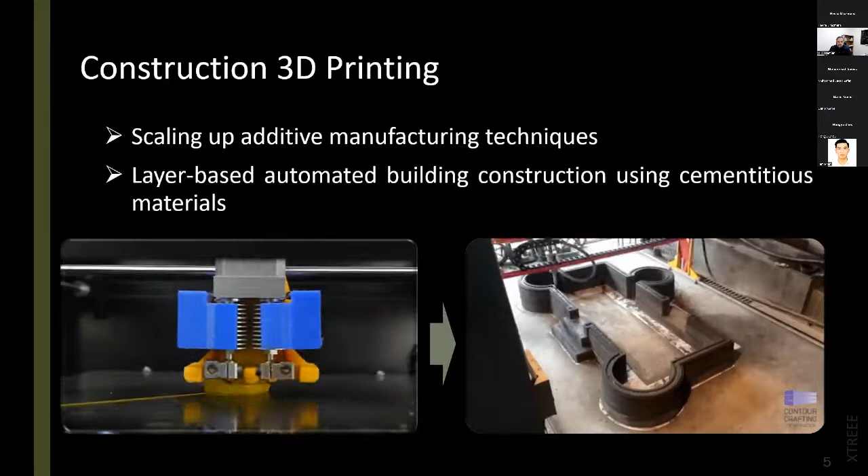I guess all of you are familiar with additive manufacturing, or those desktop 3D printers that are very accessible these days. So the idea of construction 3D printing is basically to scale up those technologies and use them for construction applications to build real scale structures by deposition of layers on top of each other.

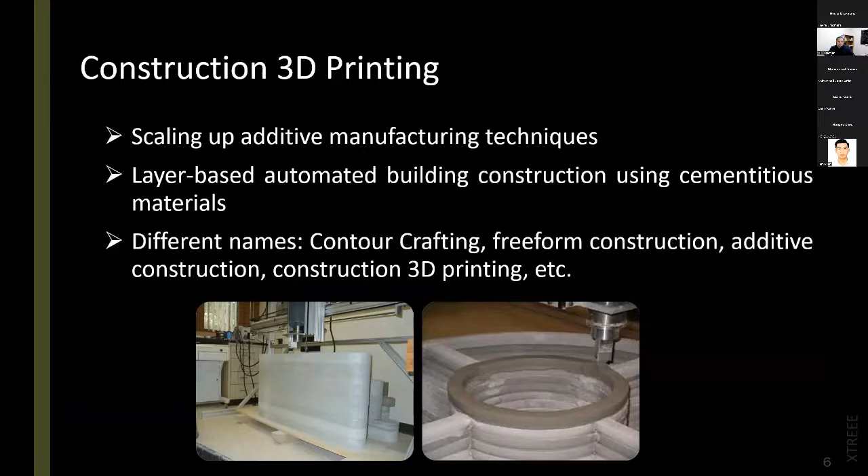You might hear different names: contour crafting, additive construction, or construction 3D printing, for the more or less same technology. Here are some pictures of samples which were printed more than 15-20 years ago using contour crafting, which was actually the first technology invented many years ago at USC.

There are many advantages that we are hoping to achieve with construction 3D printing. One of the most important ones is due to the fact that we don't need any kind of formwork with construction 3D printing. In typical concrete construction, usually 35 to 60% of total concrete construction cost is basically associated with formwork. So by eliminating formwork from the construction process, we can achieve significant reductions in construction time and cost.

The high degree of customization and freedom in architectural design is another advantage of construction 3D printing. Unlike traditional prefabrication, we don't need to replicate a specific design again and again to streamline production or reduce cost. With 3D printing, every structure can be different without any additional cost added to the project, because the robot is doing the job, and it doesn't matter if the design is the same or different compared to the last project.

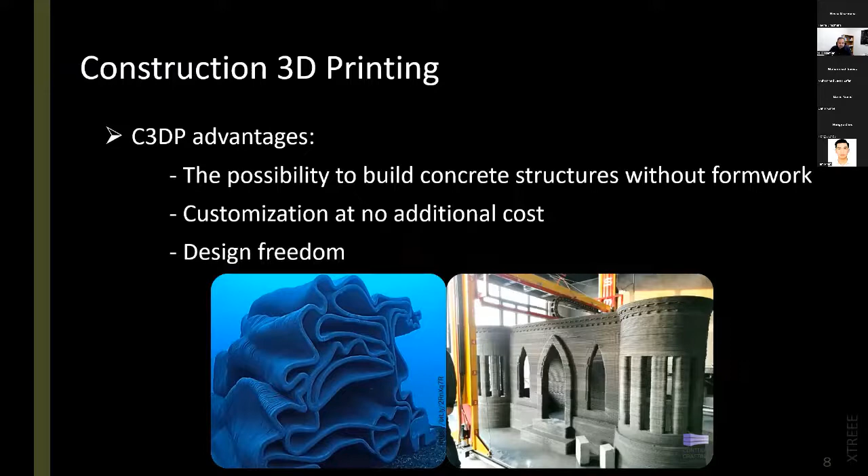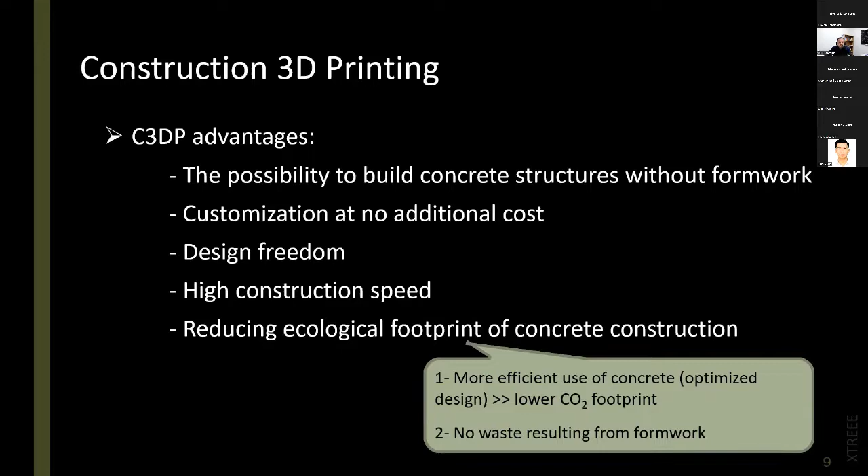Because of the automated nature of this technology, we are talking about 3D printing of, for example, houses in a matter of a few days rather than several months. The environmental aspects could also be much improved in construction and infrastructure, because of several reasons including the shorter construction period, more efficient use of materials, and getting rid of formwork, which generates a lot of waste.

As a platform technology, construction 3D printing has a lot of applications in different areas. A lot of people and companies are working on 3D printed bridges, especially in Europe and more recently in the US. 3D printed houses, especially for low-income housing, is another interesting application domain. And 3D printed towers for disaster relief or emergency construction of temporary or permanent shelters is another area that different agencies are working on.

Here are two images related to a project that General Electric is doing. They are investing a lot of money on using construction 3D printing for wind turbine tower construction, which would significantly reduce the construction cost compared to traditional ways of building wind turbine towers, using steel segments in factories and transporting them to the construction site, which is super expensive.

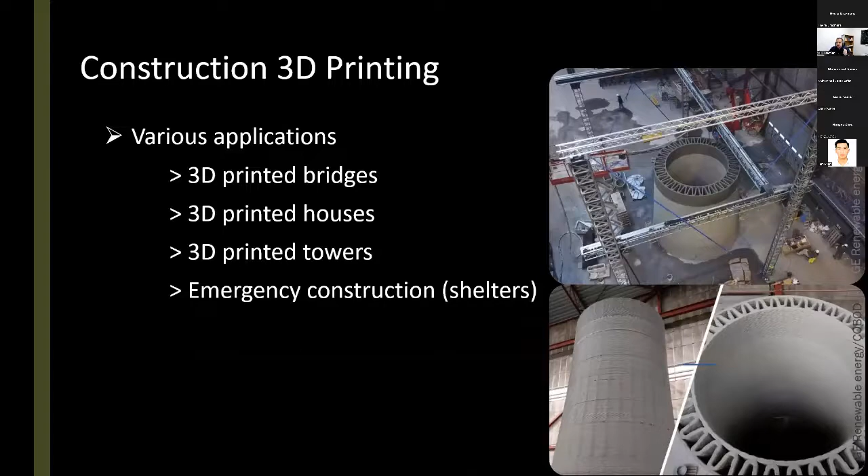In terms of implementation scenario, there are two different mindsets. One is that we can use construction 3D printing on the construction site to build any structure in one shot, without any assembly. The other approach is to set up construction printers in a fabrication site in a factory with controlled environment, and then ship those prefabricated and 3D printed elements to the construction site. Each of these scenarios has advantages and disadvantages, so there's a lot of debate, and it's an open question for what application, what kind of technology implementation would be more efficient and useful.

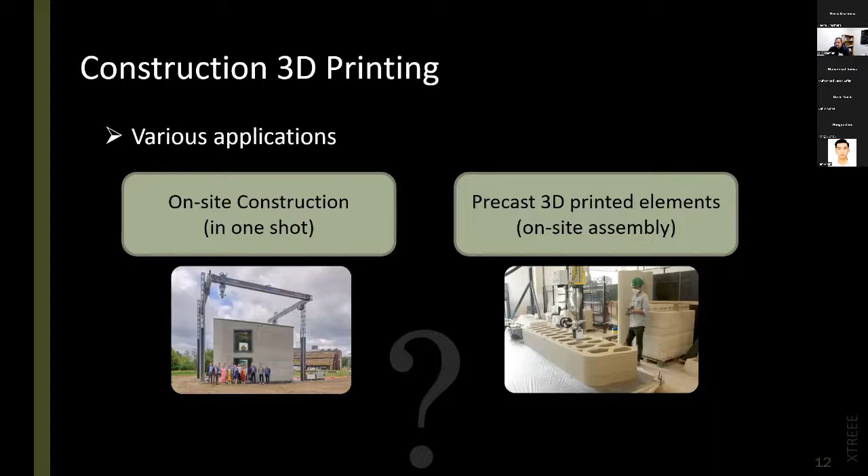On the other hand, changing an industry which has been more or less the same for a long time is not very easy. Supply chain and other aspects of the construction industry have been streamlined over decades, and changing that would be difficult. The other challenge is basically a technical one related to the technology itself.

Although the applications of this technology have so far been limited, even in these limited demonstration projects we have seen many issues, especially with respect to the reliability and robustness of the process and the equipment involved in construction 3D printing.

The next challenge is related to building codes. We have strict construction regulations in place to ensure the safety and resiliency of new structures. But since a new technology like construction 3D printing is still not included in the building codes and design codes, it makes it difficult for agencies and developers to adopt this construction technology.

And then there's the fact that we are mostly talking about specific aspects of construction. For example, in building construction, 3D printing is mostly used for only building walls, not for example roof construction or foundation, which are still done manually. And the same is true for reinforcement.

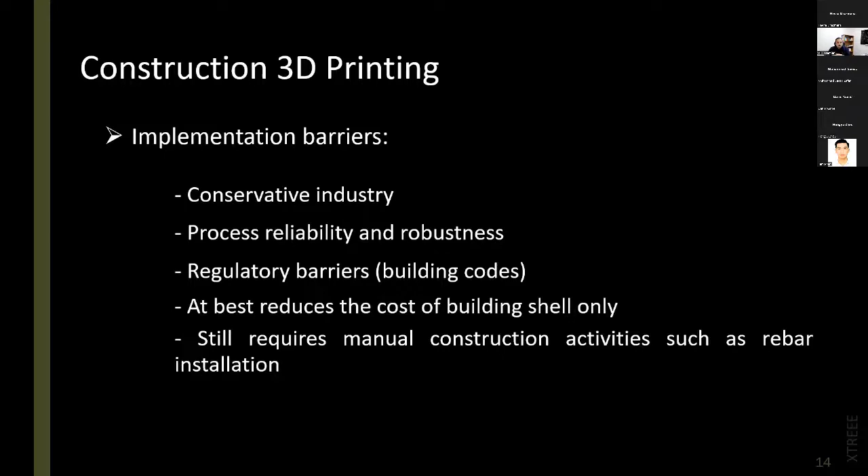This last point was the motivation for us to start the project at LSU, to investigate some innovative printing materials, so-called self-reinforced printing materials for construction 3D printing, to see if we can reduce or eliminate the need for manual rebar installation in some applications, more focused on the transportation infrastructure.

We have right now 2 active projects. One is more focused on using steel fiber reinforced printing materials, and the other is more focused on using ECC, a topic that Dr. Hassan and others have been working on at LSU for years, with amazing advancement in that field. But today, the focus of my presentation is more on the steel fiber reinforced printing materials.

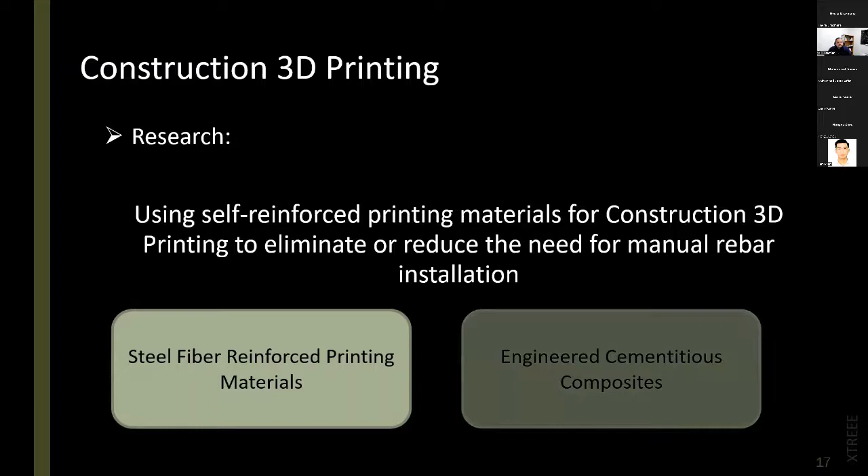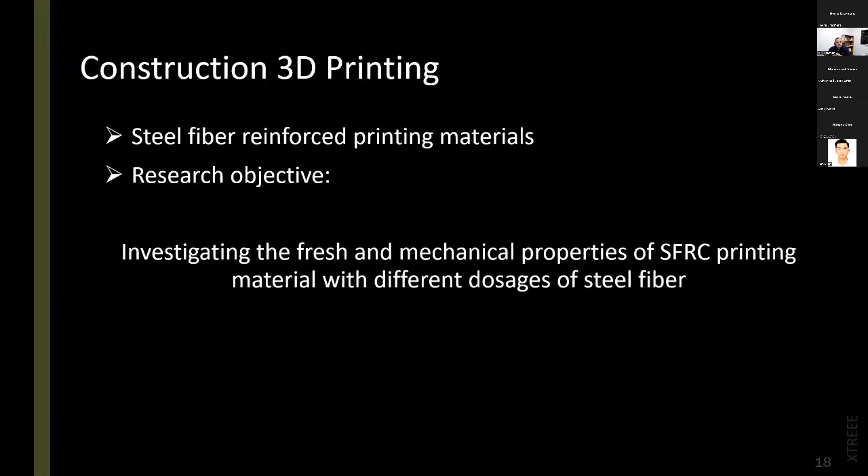In our project, we are trying to understand how much improvement in the mechanical properties of printing materials we can get with different dosages of steel fiber. In this section, I'm going to talk a little bit about some of the preliminary results of our ongoing research project.

We decided to use 1/2 inch steel fibers with a diameter of 0.2 millimeter. These are some steel fibers which are actually used with UHPC mixtures. They are coated with brass, with special coating to improve the bonding between the fiber and the concrete.

In terms of experimental program, we have selected different parameters like sand to powder ratio. The idea was that we wanted to see if we can reduce the amount of Portland cement in our mixtures. We also wanted to study the impact of limestone.

Fiber dosage - I told you some initial testing we did, we learned that with some modifications to our concrete printer, we can add up to 2.5% by volume of these 1/2 inch steel fibers, which was very exciting. As far as I know, this is the highest amount of steel fiber that have been used for construction 3D printing, 2.5%. So we wanted to go deeper and see what's the impact on the properties of materials.

Based on some initial testing, we learned that the workability range of 170 to 180 millimeter of flow with the flow table is the range that we need for our mixtures, so that's what we used for all of them. That means they had the same level of workability, and we had to add higher dosages of superplasticizer to mixtures with more fiber to reach that target workability range.

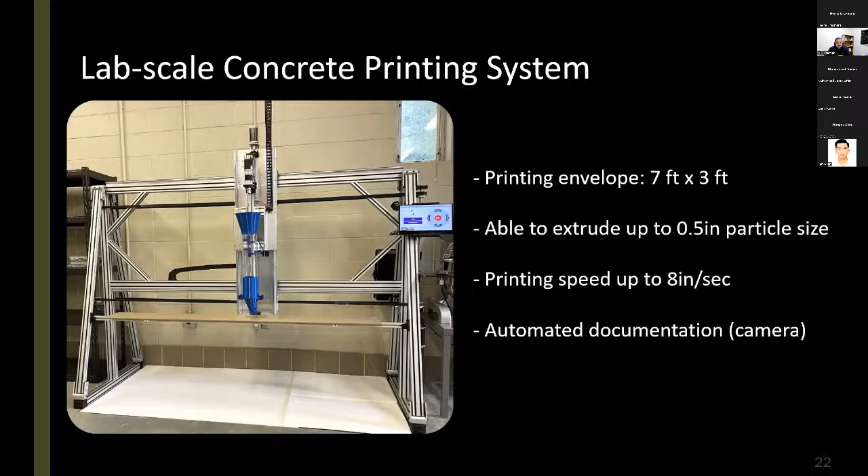And of course, for our printing experiments, we needed a printer. This is the linear concrete printing platform which I developed for my PhD students. It has a build envelope of 7 feet by 3 feet height, and is able to handle aggregates up to 1/2 inch maximum size, printing at a speed of up to 8 inches per second. We also have documentation cameras which are automatically triggered when we run an experiment.

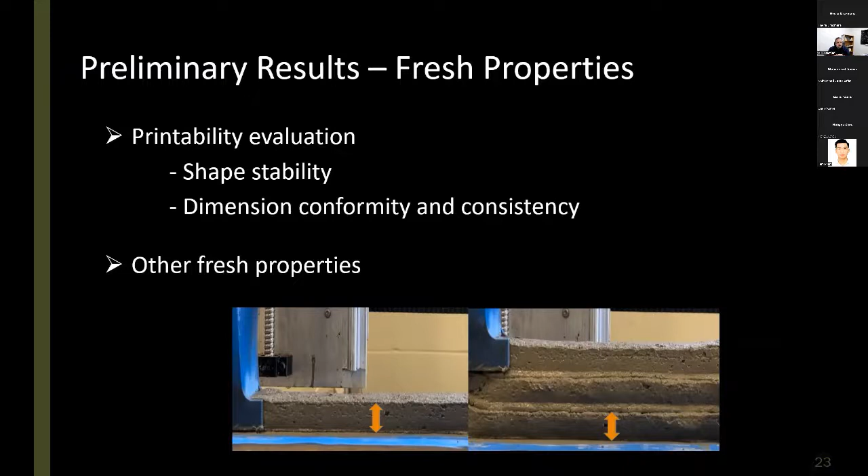In terms of fresh properties directly related to the construction 3D printing process, shape stability is the most important property we look into. Then some other parameters, even qualitative ones like surface quality and variations in the dimensions of layers, and some more conventional tests which are very useful for characterization of our material and finding correlations between different properties of our mixtures, including workability loss over time, initial setting time, and some rheological characterizations using an ICAR plus rheometer.

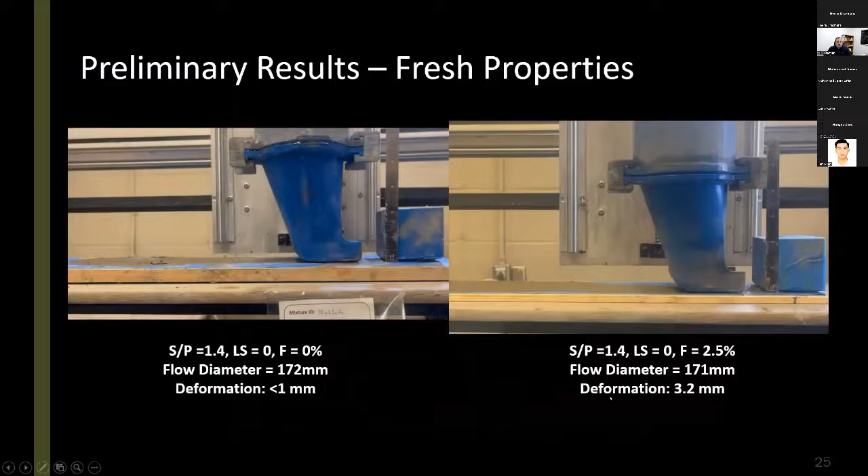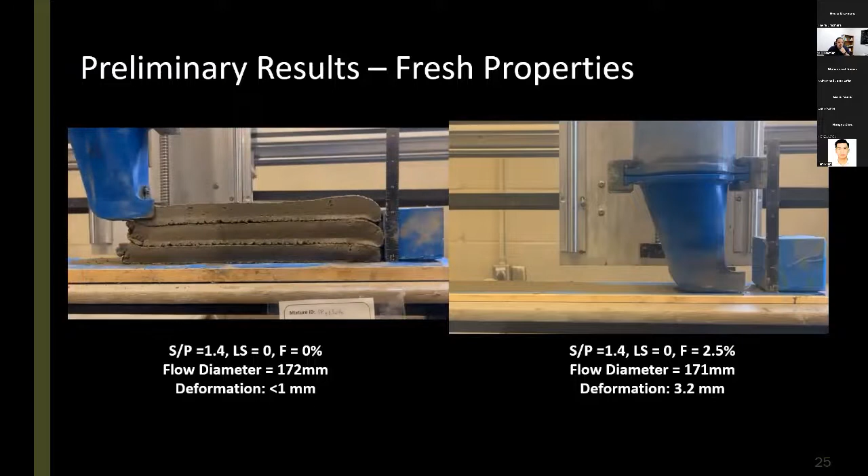I'm not going to present all the results because of the limited time we have, but just to give you an idea of the data collected so far - these are some experiments in terms of shape stability. This one is a mixture with better and higher shape stability, so lower deformations, as you can see, lower than 1 millimeter, which is acceptable and very encouraging. Then a mixture with higher dosages of steel fiber shows some deformations here that we can measure, which is more than the previous mixture.

Here are the actual data we collected for the layer deformations. These are all the mixtures at sand to powder ratio of 1.4 at different dosages of limestone. Looking at each graph, you can see that as a general trend, higher dosages of steel fiber give us more layer deformations, which is not good, of course. Also, we don't see significant improvement in the layer deformations by addition of limestone powder.

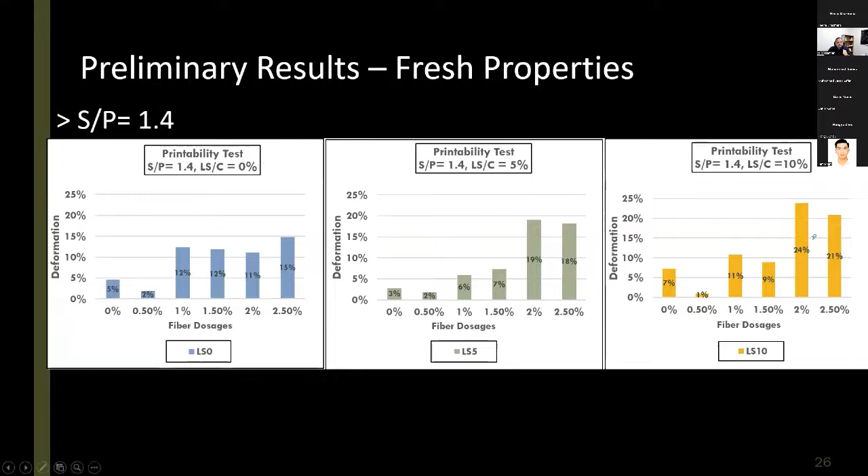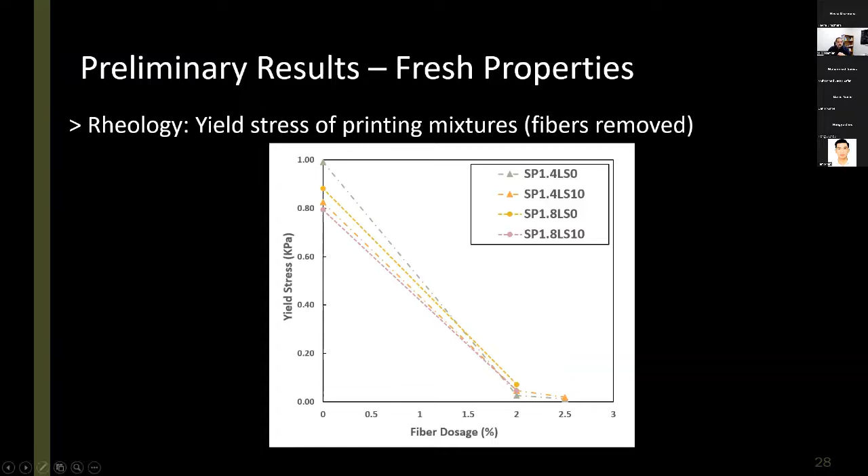I told you we had a target workability range, and to reach that level of workability for our mixtures with fiber, we had to add more superplasticizer. When we did the rheological testing, we saw a very good correlation with the yield stress, which is the parameter we expect to be somehow related to shape stability. These are rheology tests - we of course didn't include the steel fibers because the rheometers are not able to measure the properties of mixtures with steel fiber. So we removed those and just measured the matrix - these are some of the yield stress measurements. As you can see, for the mixtures with more fiber, because we had more superplasticizer, the yield stress significantly decreases, and that could be another reason for the larger deformations we measured in the shape stability test.

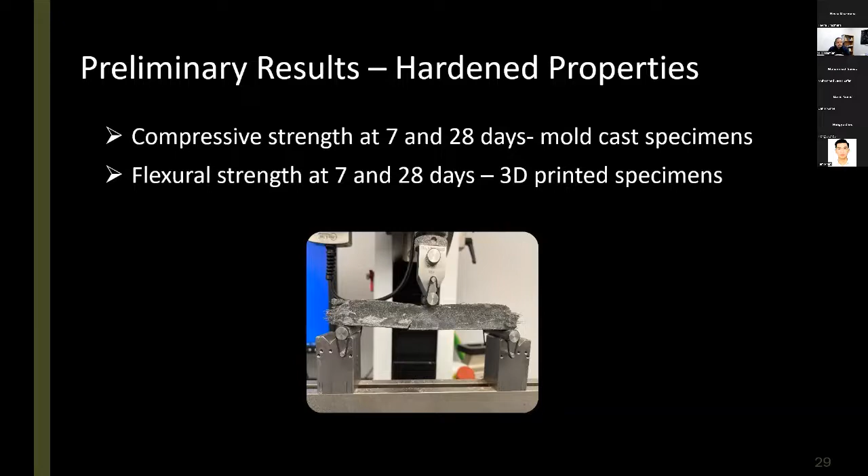On the mechanical properties side, we started with the basic properties of compressive strength and flexural strength. Flexural strength is more important and significant for us because of the target application - we are looking into the tensile performance and properties. Again, to start, we used single layer specimens which were printed using our printer.

And then we measured the flexural strengths at 7 days. These are some of the measurements you can see as a general trend. Again, with more fiber, we get better flexural strength, although there is no significant change between 2% and 2.5%.

But the increase was significant and obvious. So for the mixtures with sand to powder ratio of 1.4, we were able to get up to 160% increase in flexural strength. And for the group of mixtures with sand to powder ratio of 1.8, we got up to 92% increase in flexural strength, only after 7 days of storing these samples in the lab.

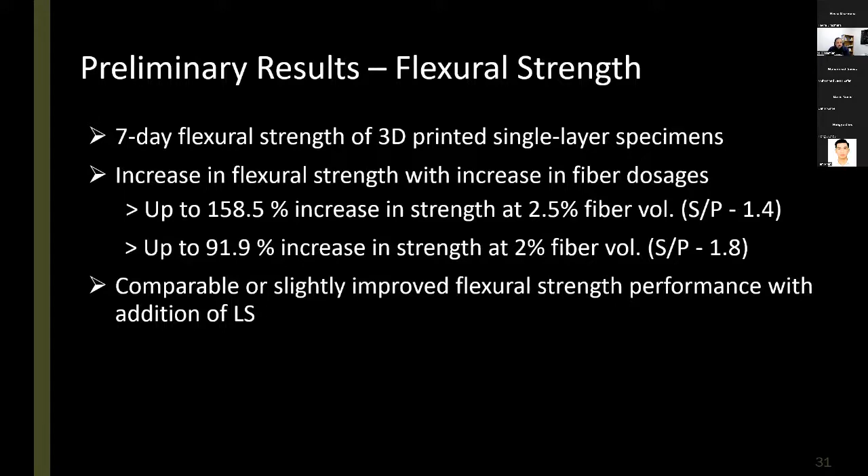And then, limestone powder is an inert material, so as we anticipated, there was no significant improvement for the mixtures with limestone powder.

We will do more, deeper measurements and investigation into the flexural properties and the ductility of these materials. But we are already seeing some early signs of improvement in ductility.

Here you can see some rough measurements we did in terms of the deformations of layers. The orange graph is showing a mixture with 2.5% fiber, the green one with no fiber. And as you can see, not only are we getting improvements in the flexural strength, but also the ductility of these materials, which is a very important factor in the tensile performance of construction materials, is being improved as a result of steel fiber inclusion at high dosages.

In terms of the next steps, we want to basically use standard 3D printed beams to measure the flexural strength and ductility of these materials.

So we had to spend a lot of time on the nozzle design and our extrusion system to be able to print these layers that you can see here. These are 4-inch wide, and we were able to print very nice and accurate samples.

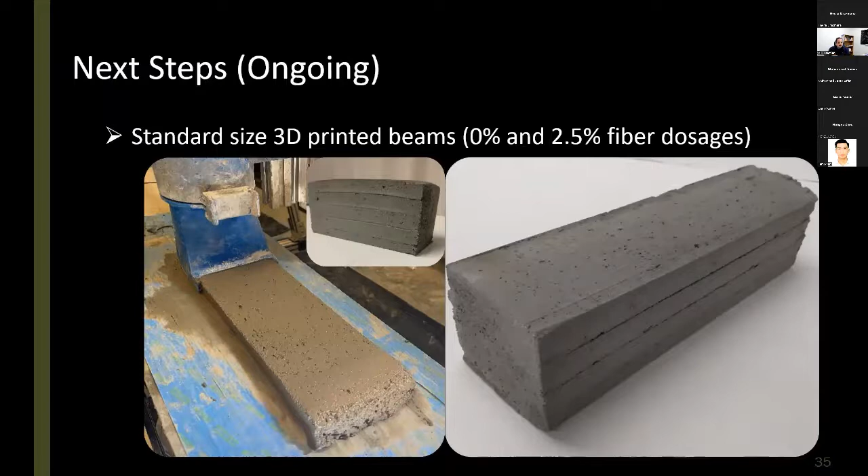These are 100 millimeter by 100 millimeter by 350 millimeter samples, both with 0% and 2.5% steel fiber, that we have been able to print in the lab.

And we're gonna basically study the anisotropic behavior of these 3D printed samples in different loading directions, and then as an additional strengthening technique to address one concern, which is the vertical reinforcement and the interlayer adhesion of these layers.

And in general, in the long run, the focus and the vision of my lab is moving towards full automation of the construction 3D printing process.

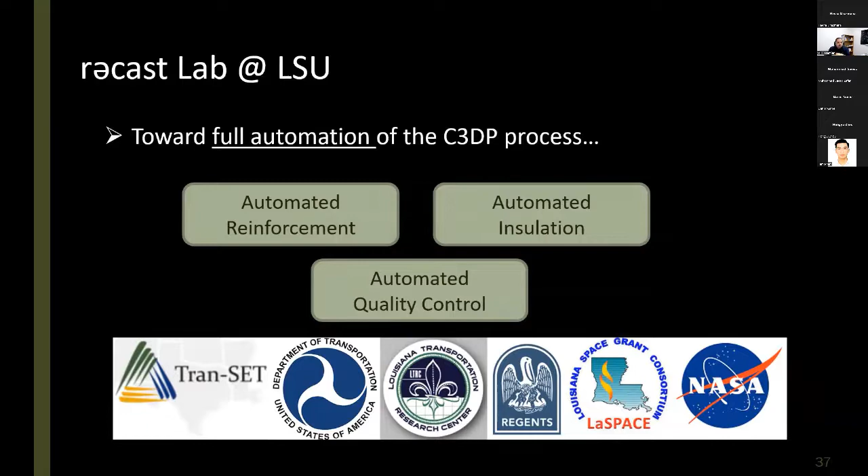I think automation is the key aspect for 3D printing. So automated reinforcement, automated insulation, and automated quality control are some of the aspects that we are researching these days in my lab, and we're gonna continue to hopefully make more progress in these directions.

I think I'm almost out of time, so a quick summary of our project on steel fiber reinforced materials. We were able to print mixtures with up to 2.5% steel fiber with some level of layer deformations. We are already seeing significant improvements in the mechanical performance of 3D printed materials with these steel fibers, especially when the dosages are higher, at 2% and 2.5%.

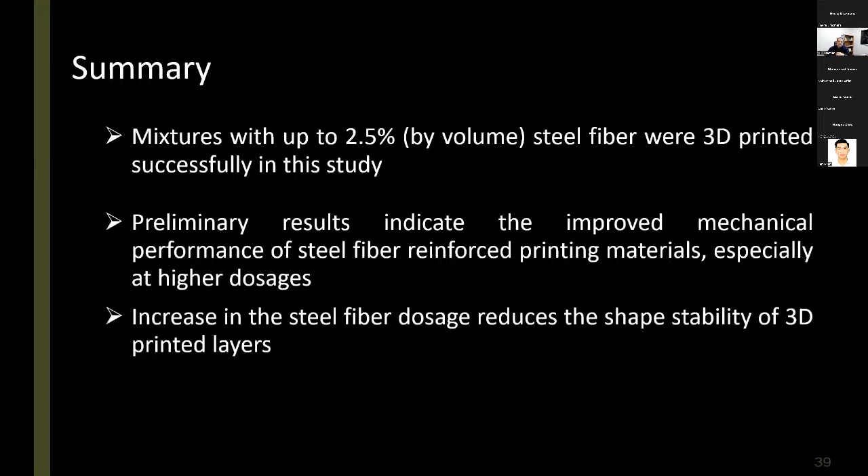On the other hand, in the fresh state, we see some negative impact of the steel fibers on the layer deformations during the 3D printing stage. So that's something maybe we can study more and find some solutions to improve the properties of those layers before they gain some mechanical strength.

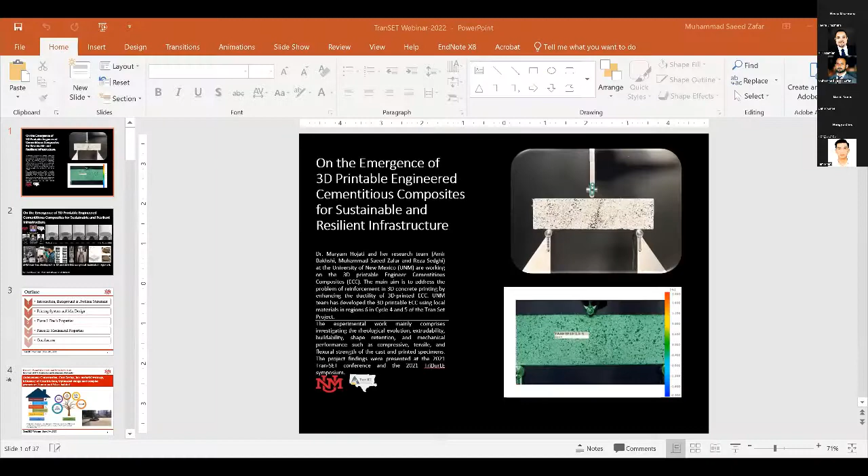Good afternoon, everyone. My name is Saeed. I'm a PhD student working with Dr. Maryam Hojati at University of New Mexico. Today, I'm going to present our research work on behalf of Dr. Maryam.

It's related to the 3D printing of engineered cementitious composites. The main aim is to address the problem of reinforcement in 3D concrete printing by introducing self-reinforcing materials. The material we developed, ECC, was used by materials available in Region 6, in Cycles 4 and 5 of the Tran-SET project.

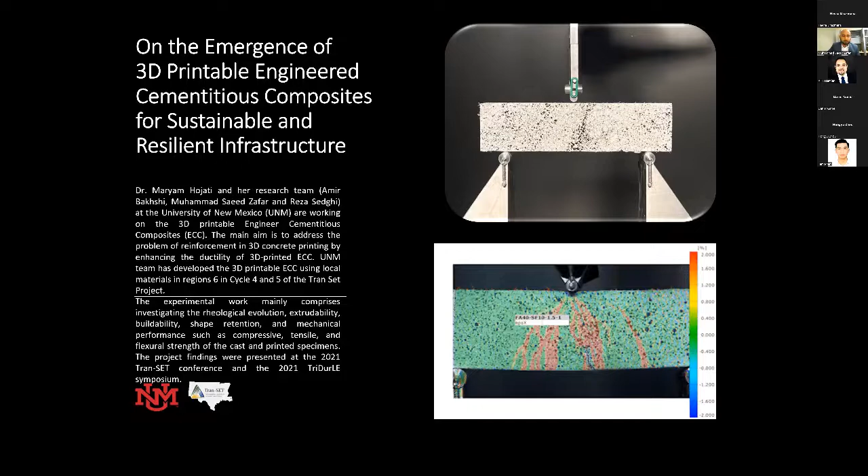This is our research team. There are two PhD students and one master's student, Amir. We are working on this project, focusing on the fresh and hardened properties of 3D printed engineered cementitious composites. This will be the sequence of my presentation.

Firstly, about 3D printing - as you know, it is gaining the attention of researchers and industrialists around the globe over the past few years because of its several potential advantages, such as automated construction. It's cost saving, because material wastage is very low, and we don't require formwork in 3D printing construction, so the formwork cost of a project can be saved. Also, the efficiency of construction is very high compared to conventional practices, and we can go for sustainable construction too.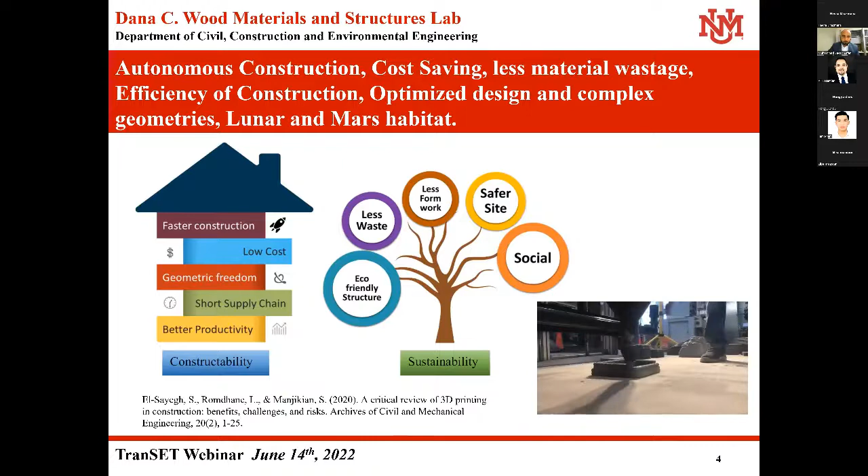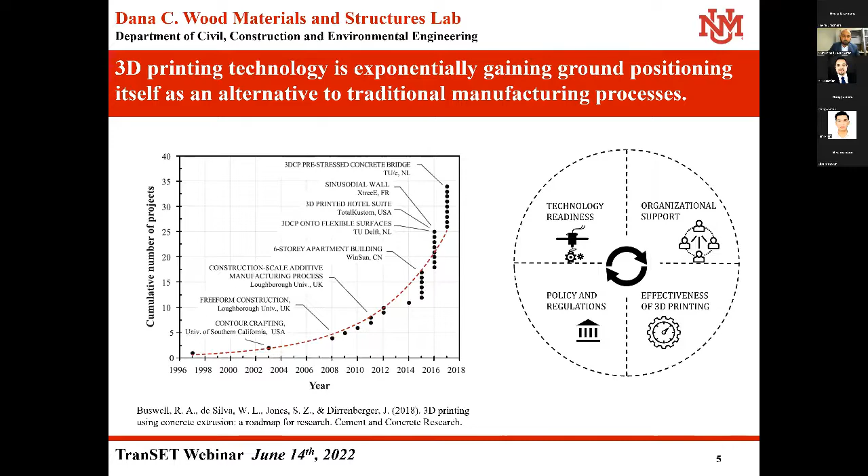3D printing construction projects around the world are exponentially growing over the past few years, but its adaptation at a larger scale is still quite slow because of several challenges, such as unavailability of standards and codes related to 3D printing. Other challenges include coming up with mixes that have sufficient rheology and strength in the fresh state. Reinforcement is another issue. Rheology and green strength have a significant impact on the quality of 3D printing construction.

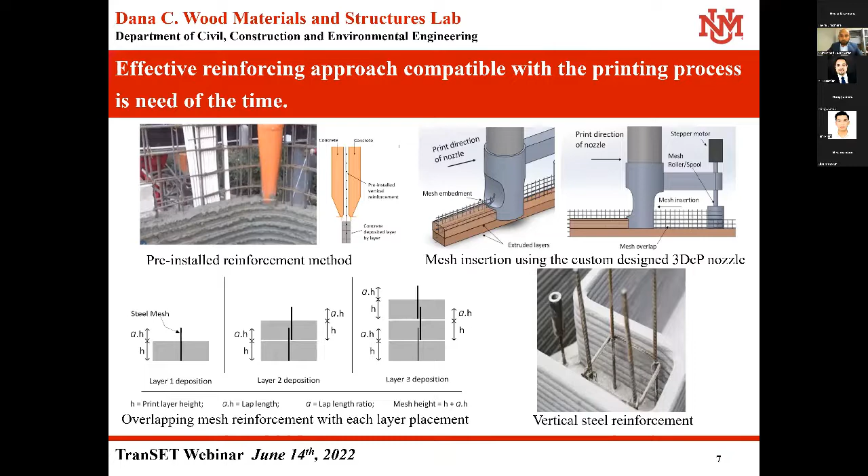So far, several researchers have used different approaches to reinforce 3D printing construction, depending on the stage of the 3D printing process - such as pre-installed reinforcement installed before starting the 3D printing, reinforcement during printing such as nails, fibers, and mesh insertion, and post-printing reinforcement such as post-tensioning. But all of these approaches are still not fully compatible with 3D printing because with these reinforcing approaches, we are actually compromising the automation involved in the 3D printing process.

To address this issue, we need self-reinforcing materials such as engineered cementitious composite, because it has several potential advantages: high tensile ductility, tight crack width, and high strength both in tension and compression. This material is also durable, which is another main issue when we talk about 3D printed concrete construction.

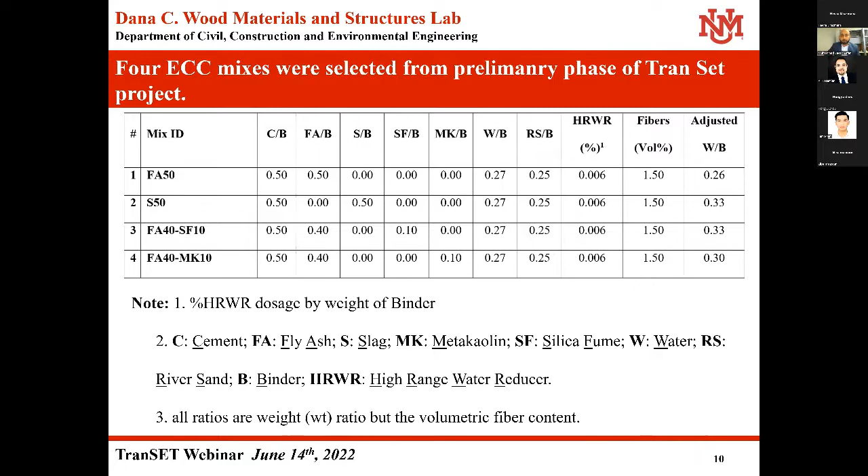In the first and preliminary stage, we worked on the mix design of ECC. Mixing procedure was another challenge to get better dispersion of fiber in the mix. From the preliminary stage, we adopted 4 mixes containing fly ash, slag, silica fume, and metakaolin. The fiber we used was PVA fiber, at 1.5% of the total volume.

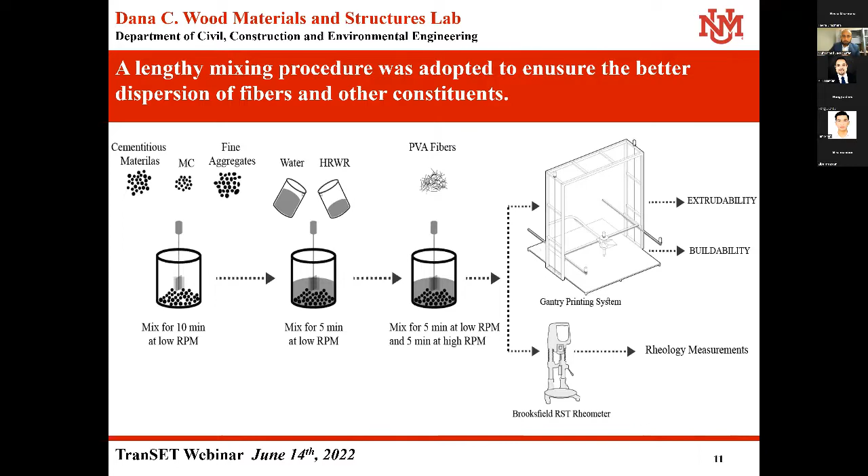This is the mixing sequence, quite long, consisting of 3 stages. The first stage was dry mixing for 10 minutes, then mixing after adding water and superplasticizer, and a last stage of 10 minutes to get better dispersion of the PVA fiber after adding it.

This is the printing system we are using. It's a gantry system with a printing limitation of 2 meters by 2 meters of print area and 3 degrees of freedom.

When we did the initial trials, the quality of printing was not good in terms of extrudability, such as dimensional consistency and conformity. As you can see, the quality of the printed filament in terms of dimensional consistency and conformity is not good, and surface quality is also not very good. In terms of buildability, most of the mixes collapsed after printing 4 or 5 filaments. Fiber dispersion was another issue we noticed during mixing - fiber clustering was observed, and shape retention was also very poor.

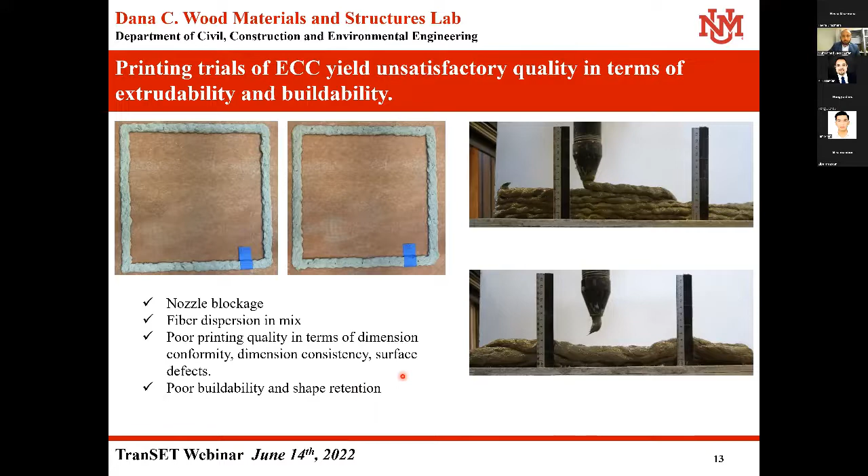So first we had to address this printing issue with ECC. We used several viscosity modifiers to get an optimized mix, and the optimized mix was obtained with the inclusion of methyl cellulose as a viscosity modifying agent.

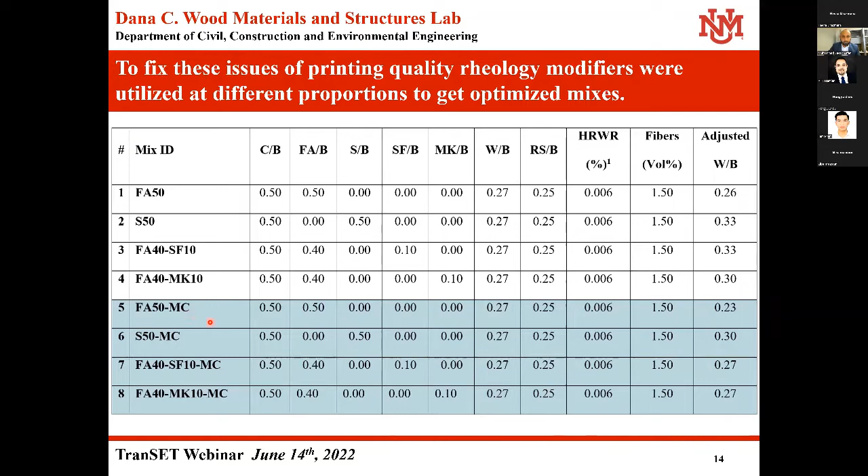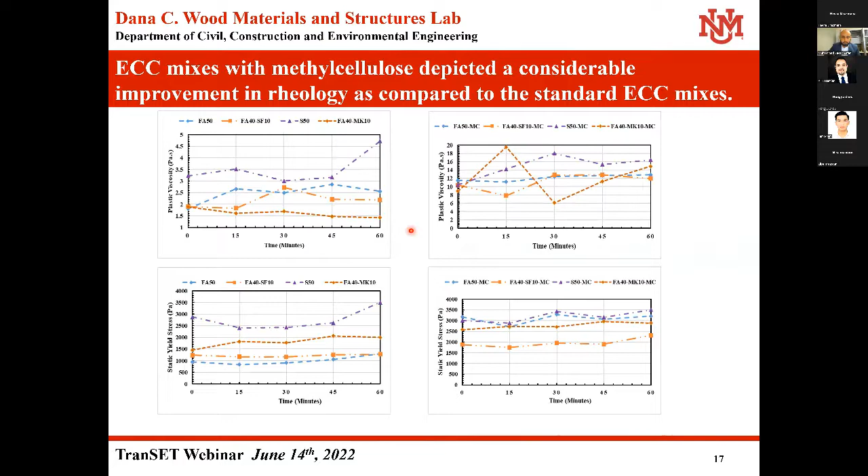For the fresh property and printability evaluation, flowability and rheology were measured using a Brookfield rheometer. With the inclusion of methyl cellulose in the mix, the rheology was considerably improved - parameters such as plastic viscosity, static yield stress, dynamic yield stress, and thixotropy all improved because methyl cellulose has the potential to adsorb onto cement particles and bridge them, leading to improvement in microscopic yield stress, which ultimately improves the thixotropy of the mix.

For the extrudability evaluation, we printed a hollow square of 60 by 60 centimeter dimensions, and the dimension was measured over the filament at 5 different locations to assess dimensional consistency and conformity over the length of the filament.

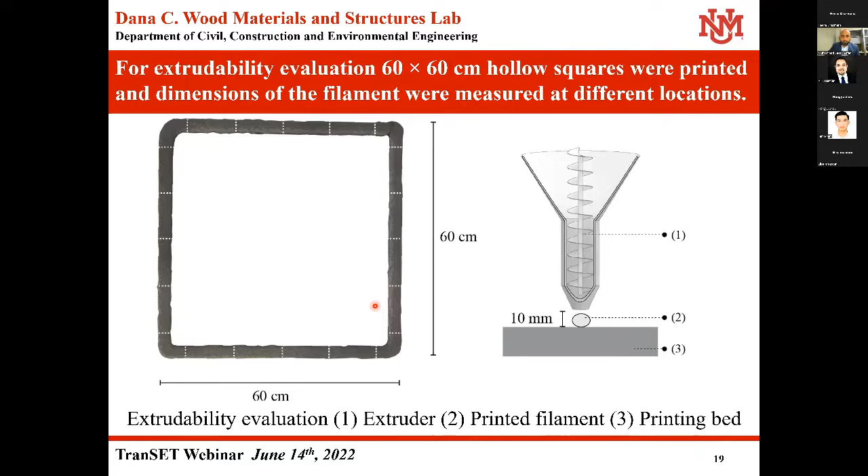We also investigated the effect of printing speed on printing quality. When printing speed was increased from 1 centimeter per second to 5 centimeters per second, we observed a reduction in filament dimensions, that is thickness and width.

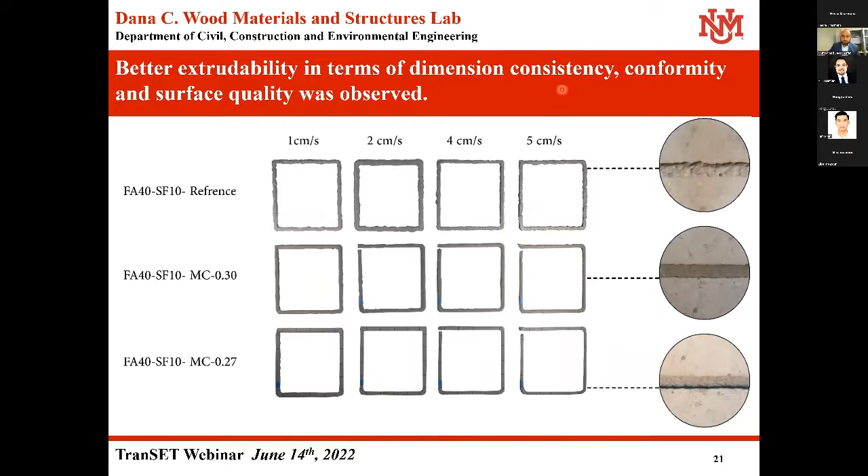Also, with the addition of viscosity modifier in the mix, the extrudability was considerably improved in terms of dimension consistency and conformity, and surface quality was also very good as compared to the standard ECC mix without any viscosity modifier.

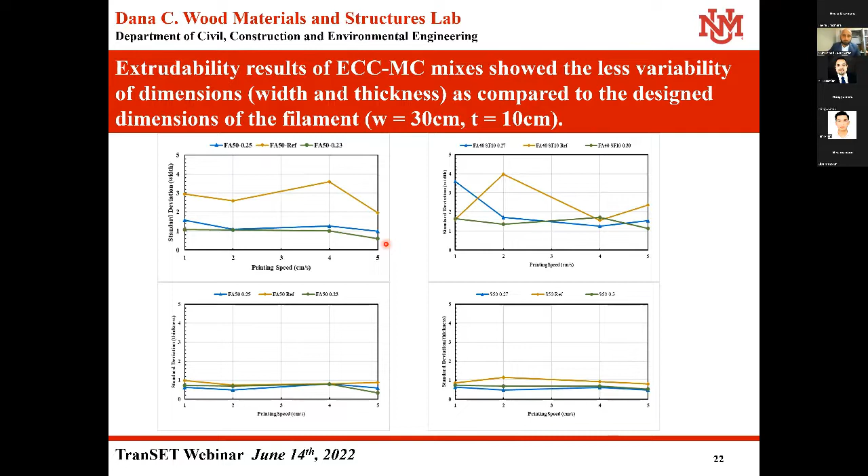We observe variability in the dimension through the standard deviation. As you can see, the reference mix has more variability in the dimension, showing less conformity. But when we add the MC viscosity modifier in the mix, the variability in the dimension over the length of the filament was considerably reduced as compared to the reference mix.

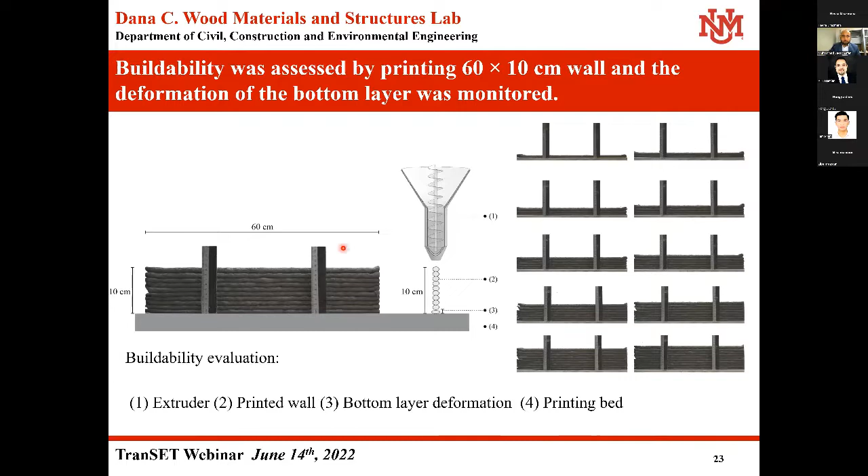For the buildability, we printed a 60 by 10 centimeter wall, and we monitored the deformation of the bottom layer with respect to printing each layer on top of it. For standard mixes, such as the FA50 mix, the mix collapsed after printing 4 or 5 filaments when there was no viscosity modifier in the mix.

We also investigated buildability for two time intervals: a 0-minute time gap and a 5-minute time gap. At 0-minute time gap, the buildability of this mix was not good, but at 5-minute time gap, the material was buildable enough to the design dimension. A similar mix with the addition of viscosity modifier showed very good buildability and shape retention at both 0 and 5-minute time gaps.

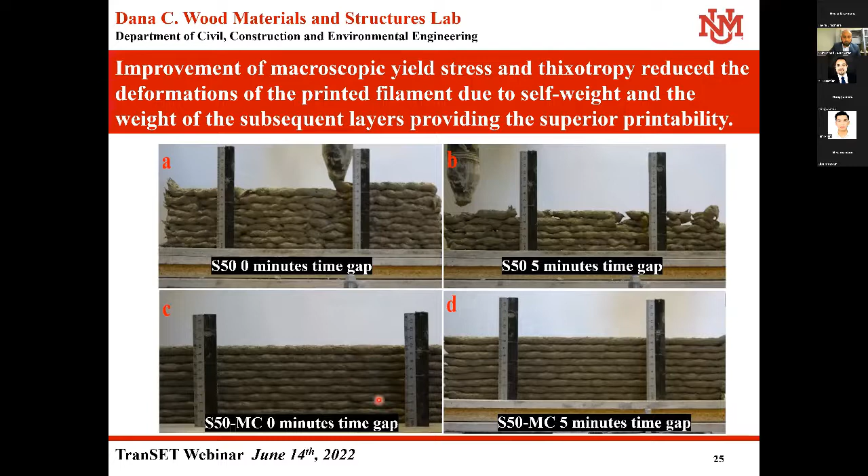Similarly, another mix containing slag, without any viscosity modifier, was buildable enough, but the printing quality, as you can see, is not very good in terms of extrudability. A similar mix was not extrudable anymore at 5-minute time gap, but when we add the viscosity modifier in the mix, it shows considerable improvement in printing quality in terms of shape retention, buildability, and surface quality.

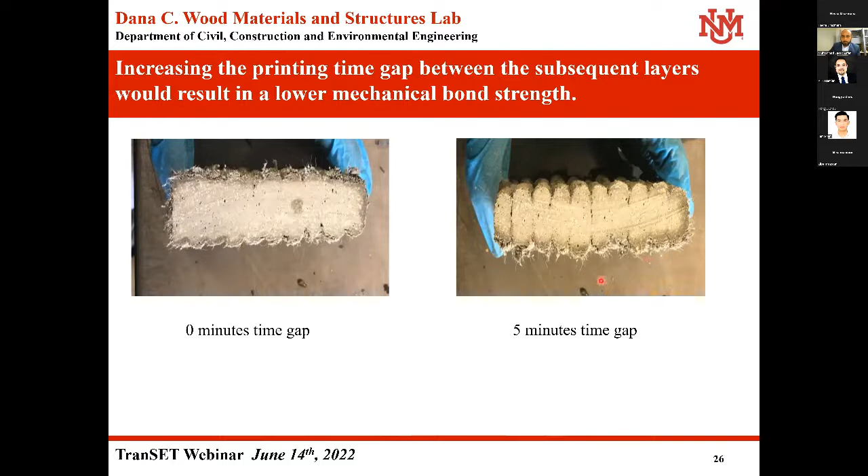But another problem with the inclusion of time gap is that the interface of filaments gets weakened. As the interlayer bond forms, you can see the porosity between the interface is increased in both cases. This could lead to a decrease in mechanical performance and also some durability issues after construction of 3D printed concrete.

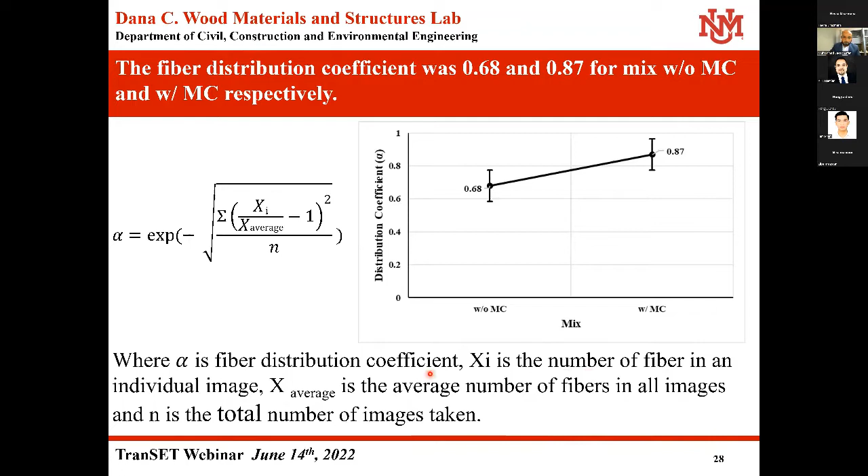To confirm it, we also measured the distribution coefficient. In case of mixes without MC, the distribution coefficient was 0.68, but it increased to 0.87, which shows better dispersion of fibers with the addition of methyl cellulose. This is another reason why we get better quality in terms of buildability, extrudability, and shape retention.

In the next phase, we are investigating the mechanical performance of the mixes. First, we measure the compressive strength of 50 millimeter cubes extracted from a printed specimen.

The mixes with slag show better compressive strength as compared to the other mixes. Both had 1.5% and 2% addition of fibers.

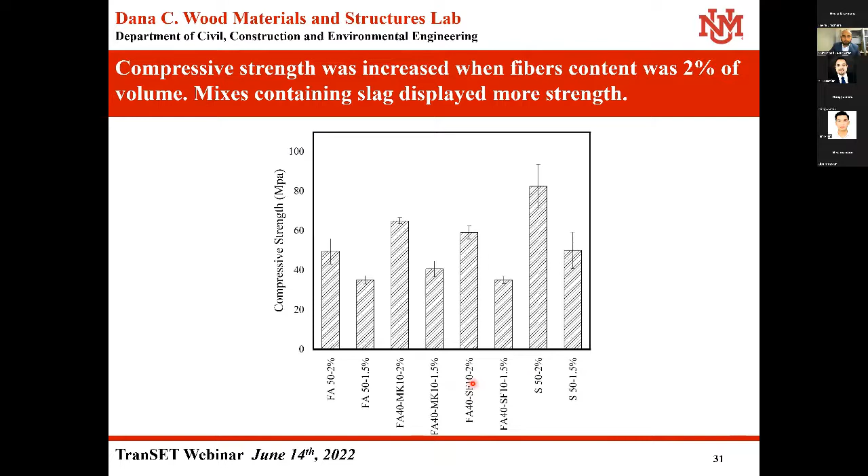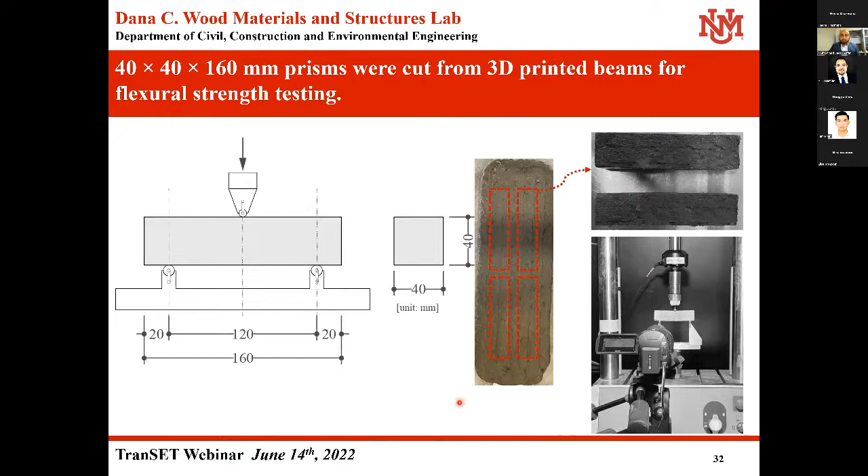To measure the flexural strength, we printed a beam and extracted a 40 by 40 by 160 mm prism from that beam to check the flexural strength of the printed specimen. We also compared the effect of fiber content, both 1.5% and 2%, and there was considerable improvement in flexural ductility when we added 2% of the polyvinyl alcohol fiber in the mix.

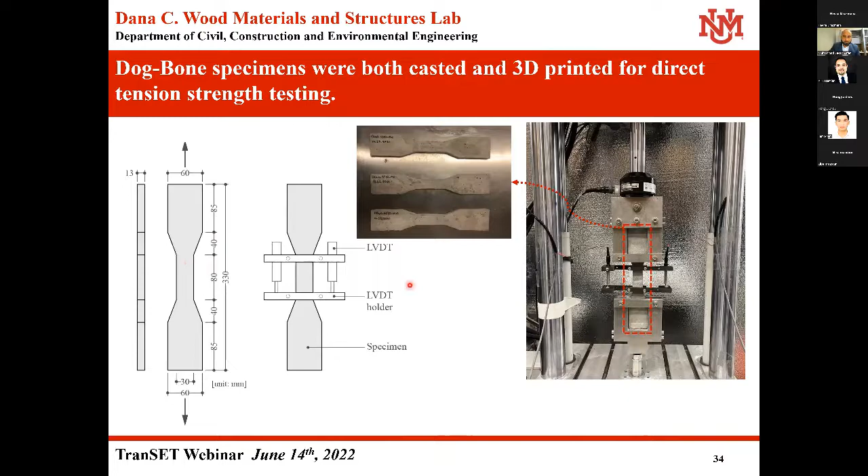For the tensile ductility, we used a 3D printed dog bone specimen, and the results show comparisons at 1.5% and 2% fiber inclusion. With the addition of 2% fiber in the mix, the tensile ductility was considerably improved as compared to the 1.5% fiber mixes.

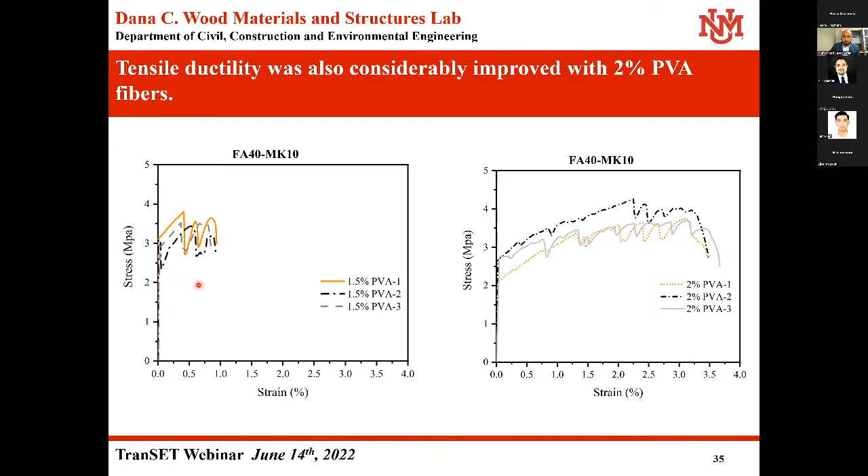In the end, the methyl cellulose was a quite effective rheology modifier, and it helped improve fiber dispersion in the mix, which ultimately helped improve rheological properties such as plastic viscosity, yield stress, and thixotropy.

For the effect of printing speed, we observed that with increasing speed from 1 centimeter per second to 5 centimeters per second, the printing dimensions such as width and thickness kept decreasing. This shows that we have to adopt an optimized printing speed for our mix to get better results in terms of printing quality.

In terms of mechanical performance, the 2% addition of fiber in the mix shows better performance in terms of flexural ductility and also tensile ductility.

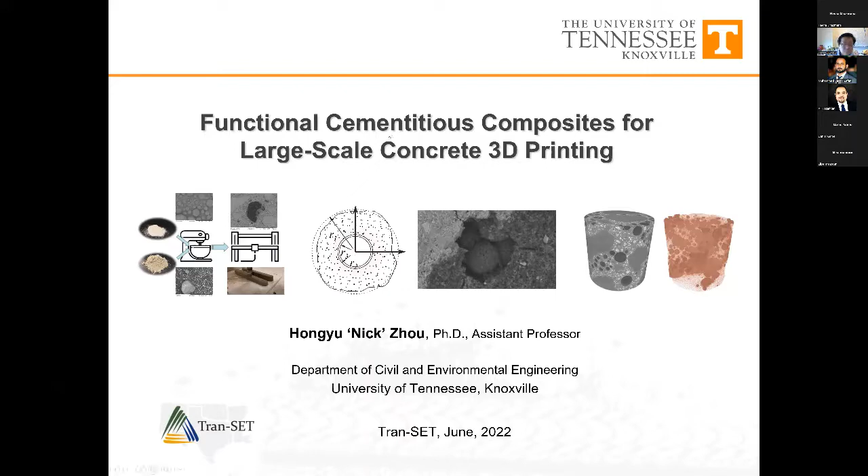Today I'm going to talk a little bit about functional cementitious composite for concrete 3D printing. From the previous two talks we've heard a lot about concrete 3D printing, its advantages and disadvantages, so I'm not going to repeat what's already been discussed.

One thing I really like to reiterate is that this new construction technology provides a very different interaction between the materials and geometric forms for buildings and infrastructures. Because of that, there are new functionalities that can be invoked from this interaction that could involve thermal energy, acoustic, optic, structural, and many more functionalities.

My talk today is going to focus on the utilization of material systems in generating some of those functionalities that would otherwise not be possible with traditional construction techniques. Before we jump into the topics, I just want to talk briefly about what functional cementitious composites are, what functionalities people have achieved so far, and what can be integrated into 3D printing.

I'm listing some of the more well-known examples of functional cementitious composites, which include lightweight and ultra-lightweight cementitious composites that use a micro-size lightweight component called fly ash cenosphere, studied since about 10 years ago. We also have thermal energy storage enabled by microencapsulated phase change materials, or PCM.

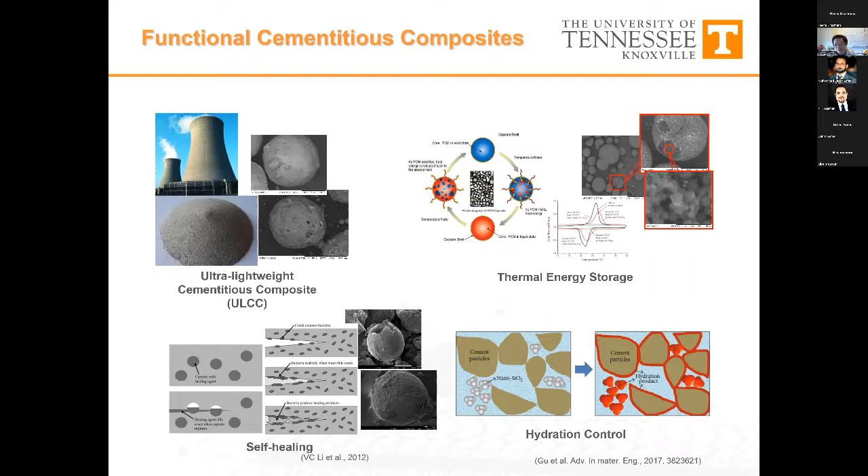More recently, people have been working on self-healing concrete, for example by adding microcapsules of bacteria groups into concrete mixtures. It can also have other functionalities in terms of surface or internal curing. There are many things that can be generated through a cementitious composite system.

Now if we look at what cementitious composite systems are, we have majorly three different phases: the continuous matrix, which is the hydration product of the binder, whether it's a Portland cement system, gypsum, polymer, or lime-based binder, and many more. We also have a discontinuous phase, which is our aggregates, and sometimes air voids, either naturally occurring or artificially induced, which I'll talk about later.

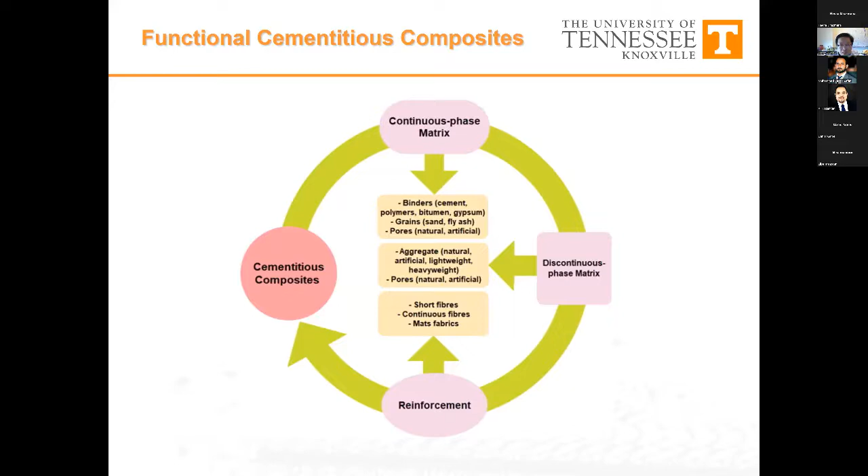From the previous talks we've heard a lot about reinforcement, different reinforcing strategies in 3D printable concrete, including short fibers, which is the most common form, and sometimes continuous fibers and fabrics.

In terms of the multifunctionality of this type of material, we look at functional smart cementitious composites that have many functions generated through the strategy of adding functional additives to the material. That would include electromagnetic shielding by invoking the electrically conductive nature of the material.

We can have strain hardening, as we heard about from ECC and steel fiber reinforcement in previous talks. We also have damage sensing, thermal sensing, and thermal control, which is where I'm going to focus most of my research and talk today. Sometimes we can achieve mechanical functionalities by invoking internal damping, for example, into the material system.

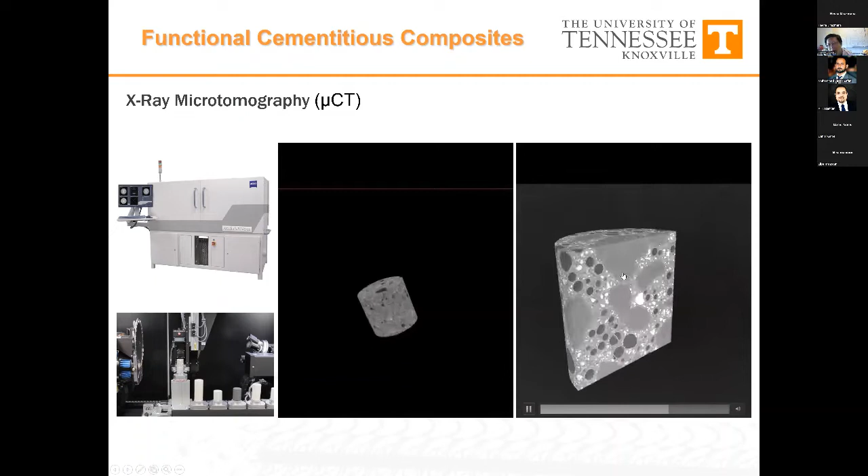If we look at a cementitious composite system's microstructure, these are the three different phases we've talked about: the continuous matrix, which is the hydration product of the binder system, the aggregates, and we can also add functional additives. In this particular case, it's a core-shell particle or particulate matter that we added to the mix, shown here in its microstructure.

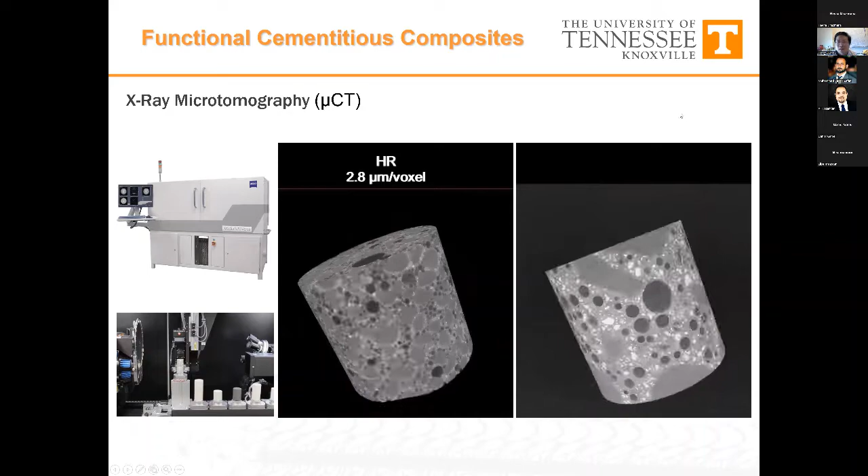So in my group here at University of Tennessee, we have developed a computational framework that takes the multi-scale nature of cementitious composites, and we can basically cross the different scale boundaries in looking at, for example, the microstructure of a cement paste with different cement formulations, the ones that involve CSA cement, slag, or fly ash and so forth, to generate a microstructure.

So this is the part where we focus our effort on: how to model the functional additives that we add into a cementitious system.

For the most part, what we have looked at so far is what we call a core shell configuration, where it has a functional core. It can be as simple as air, in the case of lightweighting or thermal insulation, or it can be, for example, PCM, phase change materials, for thermal property control. We developed a computational algorithm that can calculate the effective properties of those functional particles based on its shell property, size, and so forth, and can be homogenized into a continuous phase where it can be combined with aggregates. I'll skip a lot of the details about how this model works, but I've posted one of our previous publications that elaborates on this model.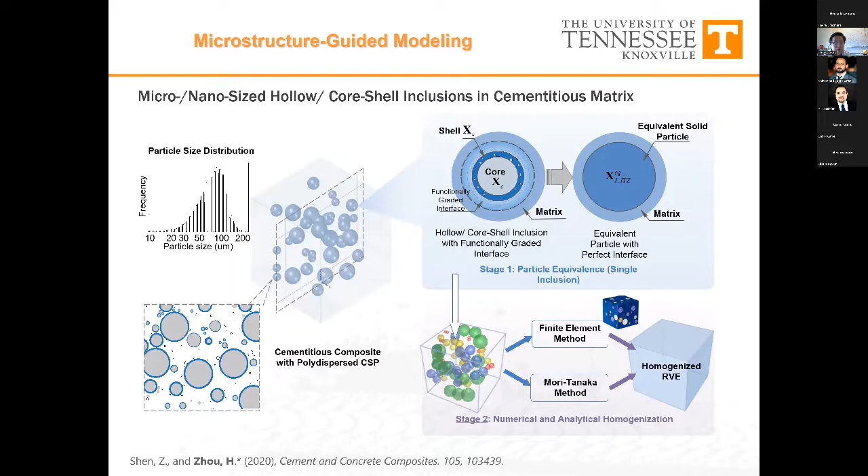Then we can use a homogenization method to calculate the equivalent properties, whether it's mechanical — in this case, what we have studied so far mostly is elastic properties — as well as thermal properties, including thermal energy storage and thermal conductivity, as well as electric conductivity and so forth.

So why are we doing this? We have this computational framework and basically try to use it to guide our material design. In this case, we want to use the microstructures we've designed in a cementitious system to achieve certain functionalities, while maintaining certain mechanical or structural properties. So we went on and did an exploration: if we want to use PCM, or thermal energy storage, as an example in 3D printing.

Why do we pick this case in the first place? First off, PCM, or microencapsulated PCM, has been pretty well studied in cementitious systems. People have conducted a number of research studies about this material. But 3D printing, in our mind, really provides the niche opportunity for this technology to be transformational in the construction business.

Because of the way concrete 3D printing works — I think we've heard from previous talks — we can strategically place some of those functional additives in places where they're mostly needed. For example, in architectural design, we can look at the orientation of a building, look at the solar tracks and the seasons, to design where this thermal energy storage capability is needed most. Or we can use stronger materials with higher mechanical properties in other places, in order to leverage that functionality.

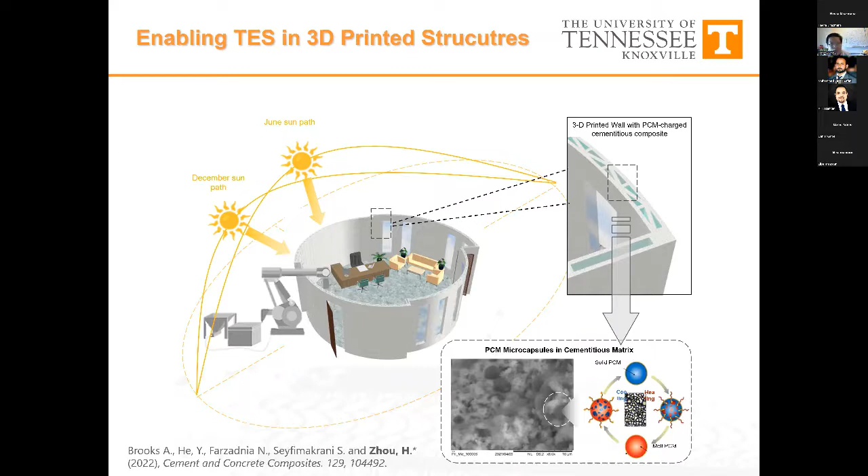So we take this as our initial step, and we want to understand how these functional additives, when added to a cementitious system, would affect the 3D printing process, both in the fresh state and also in the hardened state.

The example we take here is polymer encapsulated PCM, which is the most well understood, well studied functional additive in the thermal space — basically a polymer capsule with a paraffin wax core that can go through phase change around 20 to 22 degrees Celsius in this particular case. This particle comes in very small size capsules, roughly 2 to 3 micrometers in diameter, and often the material manufacturer will agglomerate them into large clusters for ease of handling.

So one of the initial things we want to try is: if we add those functional additives into 3D printable cementitious material, how will that impact printability — for example, buildability and so forth — and also the hardened property of the material. So the approach we take here: we took a functional additive, in this case a Micronal powder.

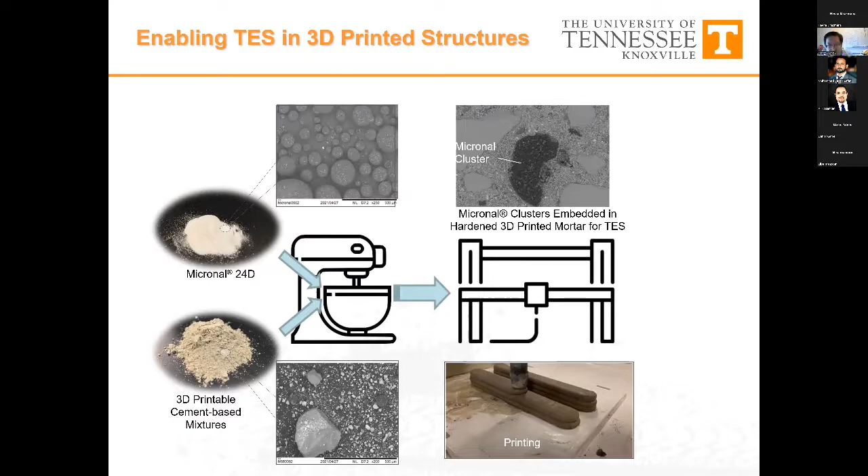The cementitious system here is a commercial 3D printable mixture donated from Laticrete International to use as a baseline, and then we added a functional particle into it. So the first step is that we design the material system at different dosages of microencapsulated PCM and different volume percentages, and then we tested the thermal energy storage capabilities using the DSC scan.

One of the first things we want to test is, based on the volume dosage, how much thermal energy it can store — not only to verify the functionality of the cementitious or composite system, but also to verify there is not a whole lot of particles or capsules getting broken during the mixing and extrusion process.

After that, we looked at how these functional additives impact the fresh properties, including flowability, buildability, and printability of the cementitious system based on different percentages of volume loading.

One thing we find pretty interesting is at the lower loading level of those functional particles, the flowability actually goes up before it slowly comes down. That is verified by the buildability test, where we see that with a lower dosage of PCM particles into the cementitious system, the buildability will first decrease because it's easier to flow, before it goes back up.

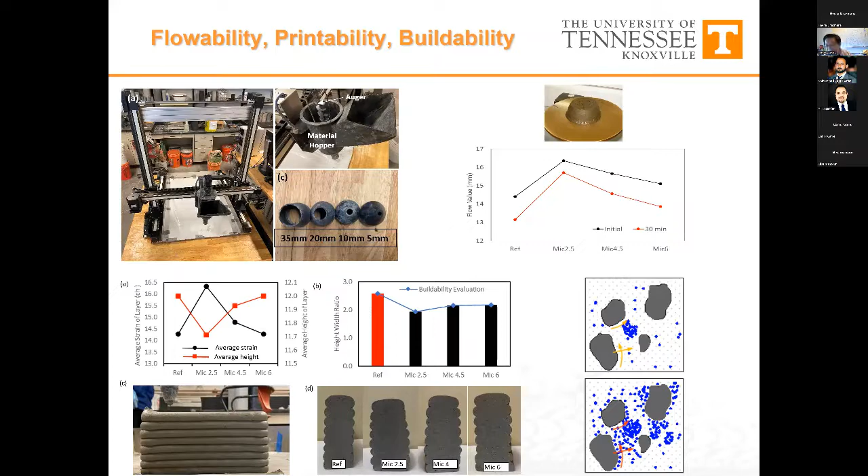One hypothesis we have is that when the volume dosage of those functional particles is low, those microspheres — if you think about the microstructure — almost act as a lubricant to mobilize the sand particles during mixing and extrusion. Whereas when the volume loading becomes higher, this starts to form a jamming mechanism that hinders the movement of those sand particles, which later leads to printability issues.

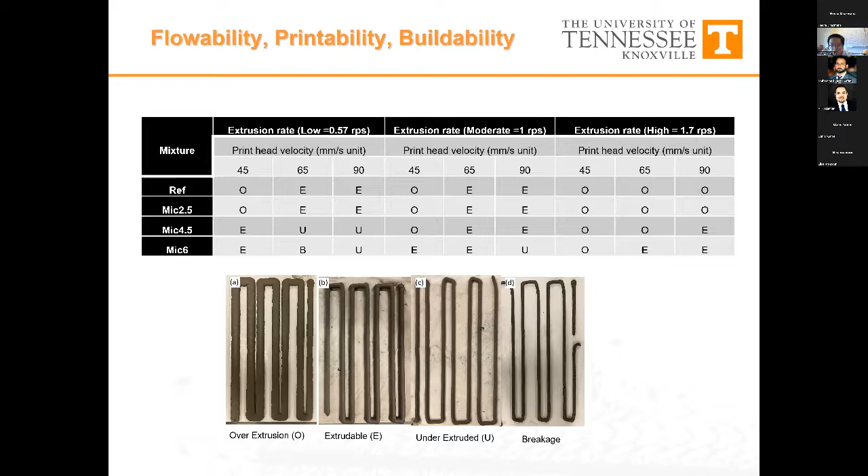With higher volume loading of micro PCM, one thing we find is it's beneficial to use a higher extrusion rate and higher printing velocity in this case, which makes sense because of the thixotropic behavior of those microparticles at play. At higher shear rate — as discussed earlier in the rheology tests — these particles become mobile, whereas at lower extrusion rate, it becomes much more difficult to extrude.

Some interesting observations here: first, for the printed sample, it's a consensus that we have much higher air porosity in the 3D printed mixes, which later impacts the mechanical property, which I'll show in a second.

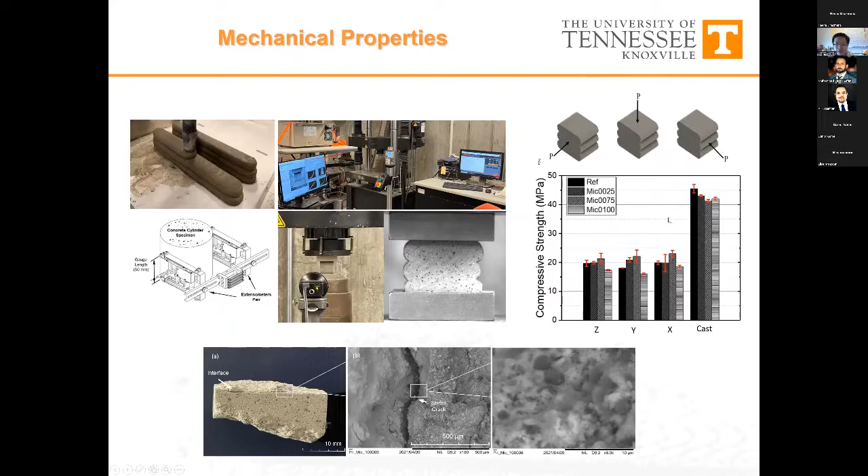Again, I think that because of this higher porosity that we observed in the printed sample, we have seen a pretty drastic drop of the compressive strength.

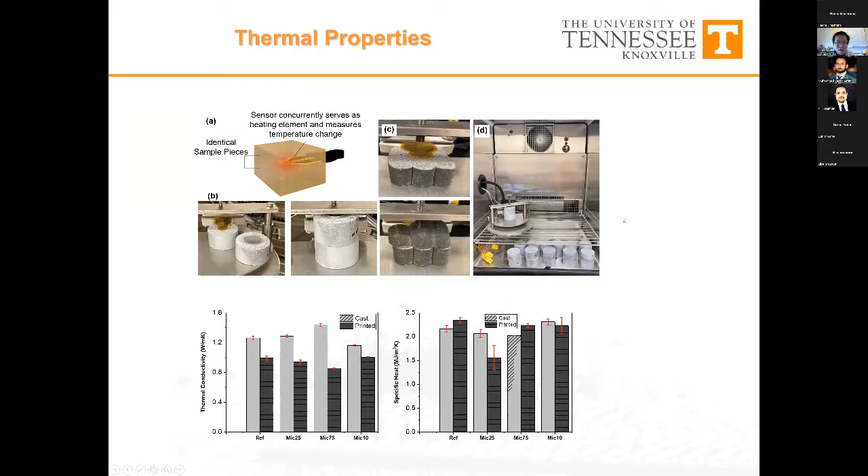We tested further the thermal properties. I'm going to skip that because nothing too intriguing that we see here, but the point is that the functional particle does not change the thermal property or thermal conductivity of the mixture in any drastic way.

Later on, we have run a demonstration test to look at its functionalities—in this particular case, its thermal energy storage capability. So the way we tested the performance is that we 3D printed a hollow cylinder using a reference mortar, which is commercially available.

Then we 3D printed the same mortar mixture with 6% of microencapsulated PCM inside. We placed them inside an environmental chamber, insulated at the top and bottom, and inserted a thermal sensing probe at the very center to measure how the air temperature changed inside the cylinders, then cycled the cylinders in the chamber to test this functionality.

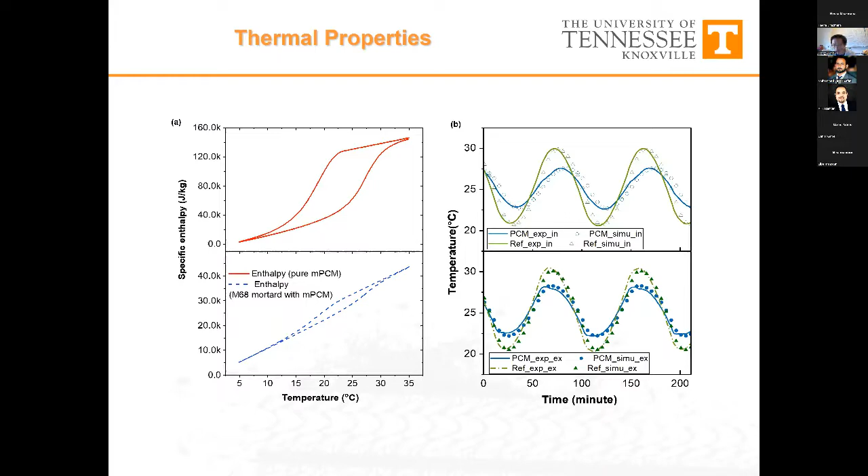If we were to build a building as an example, the PCM inside the cementitious matrix is going to provide this dampening effect of temperature to improve thermal comfort and also save building energy use.

So I'm going to wrap up my talk quickly about some future or ongoing work we're doing in my group. We took the computational model from earlier, and one thing we found out is that in cementitious systems or 3D printing in general, any soft shell functional additives we add, like the polymer encapsulated PCM, are going to harm the mechanical property in a pretty drastic way.

One thing we are currently working on is a different encapsulation technology where we use fly ash cenosphere, which is a hollow part of the fly ash, as an encapsulation shell. This is a project in collaboration with University of Alabama, using it as a capsule to hold PCM materials that can be incorporated into 3D printable mixtures.

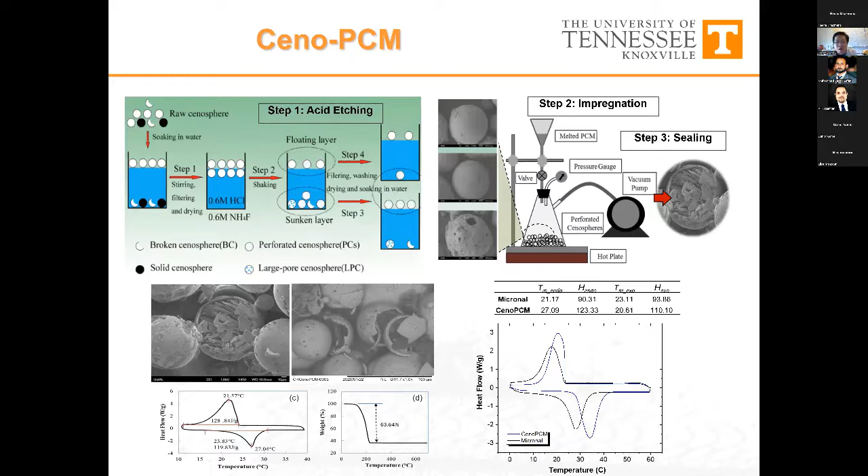I just want to show some preliminary thermal test results, and I'll come back to this slide to show lightweight mixtures we were recently experimenting with using a similar strategy, but this time inducing a very large amount of air into a 3D printable mixture.

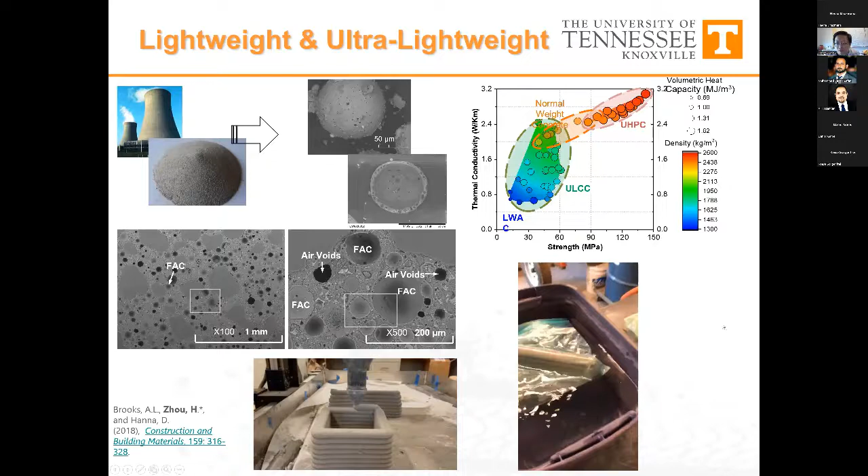So far, I think we are achieving the lowest printable density that we can see in the market right now, or in any literature right now—about 0.4 grams per cubic centimeter, which is less than half the density of water, and it's still printable and buildable.

One of the other projects we have ongoing is to use 3D printing technology to produce material that has the capability of sequestering or absorbing carbon dioxide during the use phase, and also supports biological growth—we call it a living envelope for the building facade.

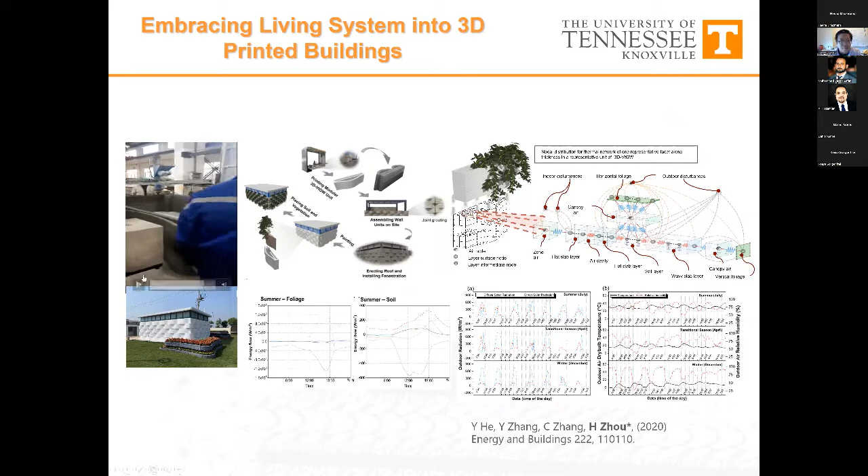Without overdoing that, we also have some computational work going on—this is a previous collaboration with a Chinese university to look at 3D printing to integrate living wall systems into 3D printed buildings.

I think I'm probably going a little over time, so I'm going to skip this conclusion section. But basically, what we're trying to get across is that functional cementitious composites have provided a lot of spaces and possibilities to 3D printing.

A lot of effort in my group now is trying to marry the material with this construction technology to invoke architectural functionalities that would not be possible otherwise.

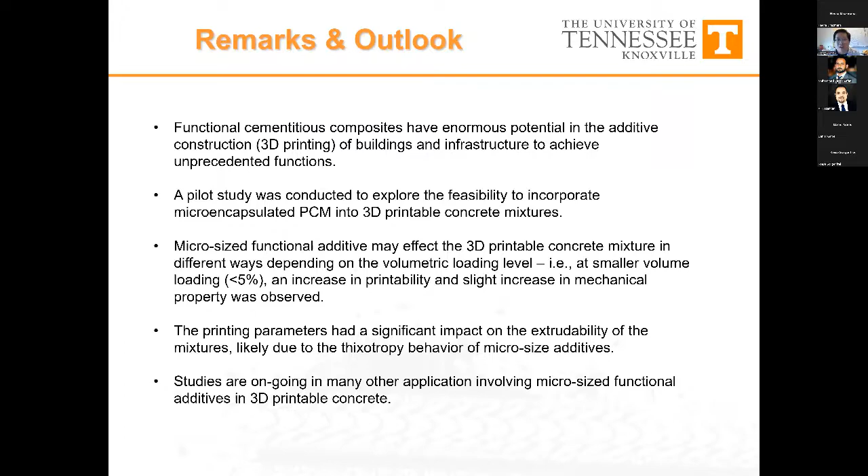With that, I want to present some of the references used in this slide, and the students or former students who worked on the project, Dr. Adam Brooks and Zhenglai Shen, who both now work at Oak Ridge National Lab, and my collaborators and the funding support from DOE and NSF.

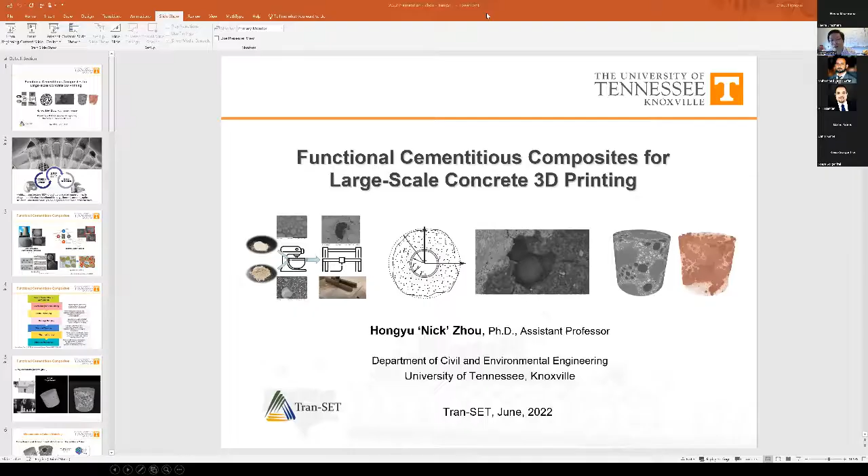And with that, I conclude my talk for today. Thank you very much.

Thank you very much, Dr. Zhou. That was really great.